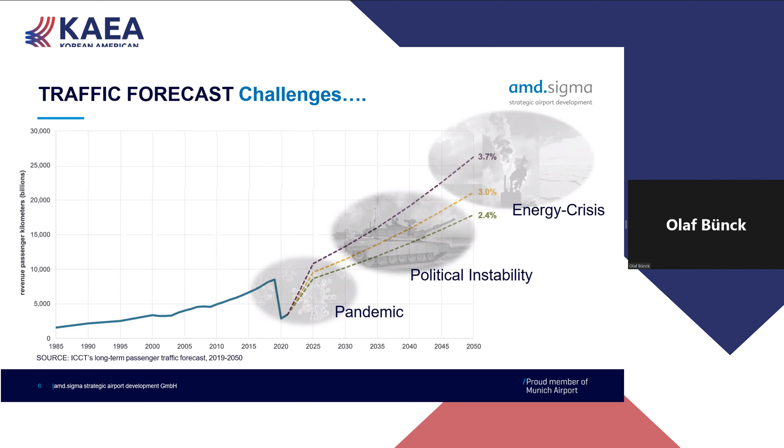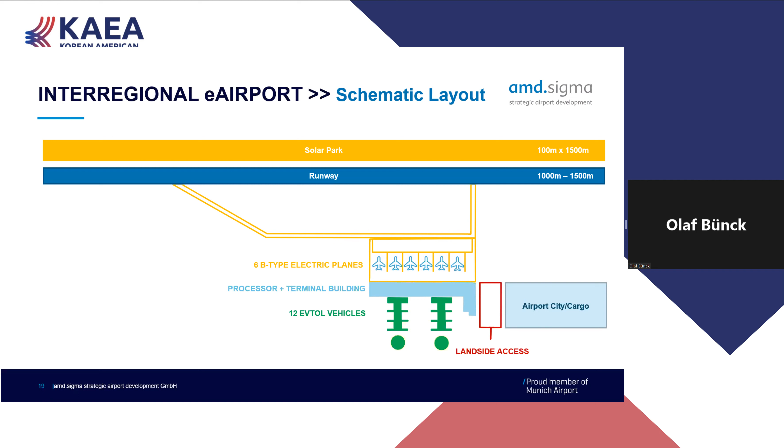So we did this, and I've got about 5 slides to go. Basically, what we did is design this airport so you can independently expand every element. If you want a bigger solar park, a bigger runway, a bigger terminal, a bigger utility building, or more stands, it's all possible without conflict with any other function. We took a long time to come up with that.

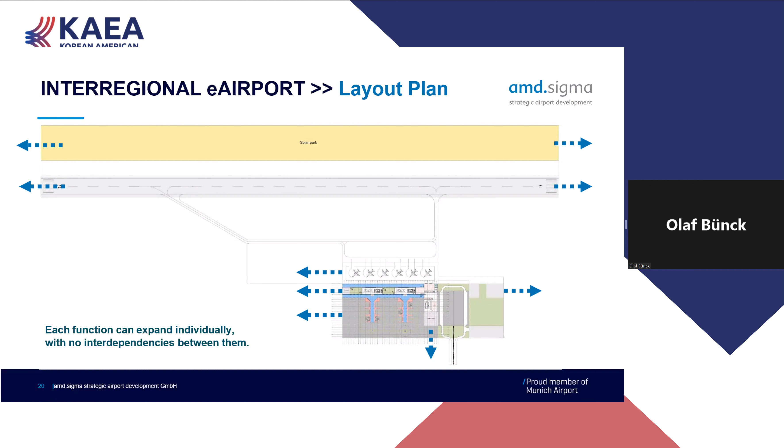And that's how it looks. You have a big solar park, a runway of about 1,000 meters, and on the bottom a terminal building that combines a vertiport and an airport. That's the first one ever designed this way worldwide, so we're quite proud of it.

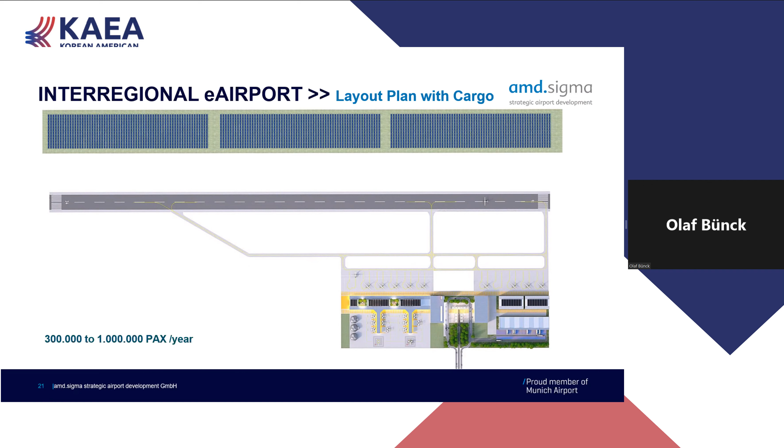And to the right, you have either an airport city or a cargo city, because we believe you can have passengers during the day and cargo during the night, and you get a much better business plan with that.

So that's pretty much how it could look. That's basically quite a lot, but you can start small. You can start with half of the terminal building for passengers. You can also start with only a little for cargo and just go piece by piece and let it grow.

So we have about 12 eVTOLs that feed passengers from the big city into this airport. And we have 6 positions for electric planes that can be 9-seaters, 25-seaters, up to 40. That's how we want to do that, and it can host anything between 300,000 and 1 million passengers.

So the last slides have a few impressions from the inside. Maybe next slide. We can skip. Last slide, we'll go ahead and advance, and then we'll wrap it up and pass it over to Rex.

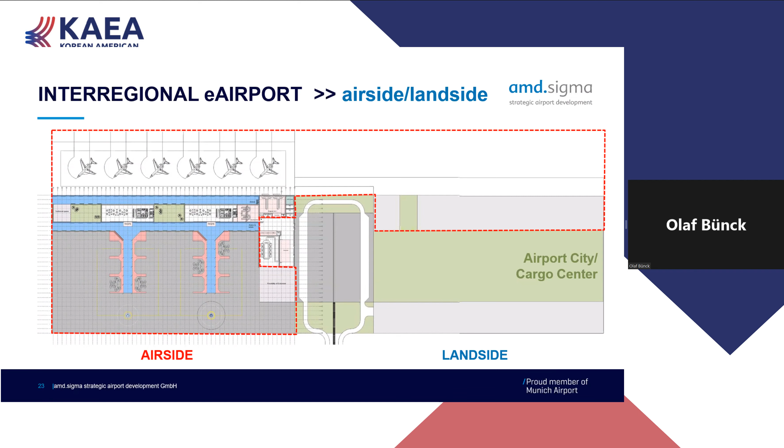So next one, please, that's just the diagrams. If one is interested, you can get the presentation later and look at it. Next one. Next one, I just want to show these interiors.

We want to build this as a wooden construction. It's all on one level. There's no escalators, no elevators, no pushback. It's a very simple building with inner yards that are green, open spaces with natural ventilation.

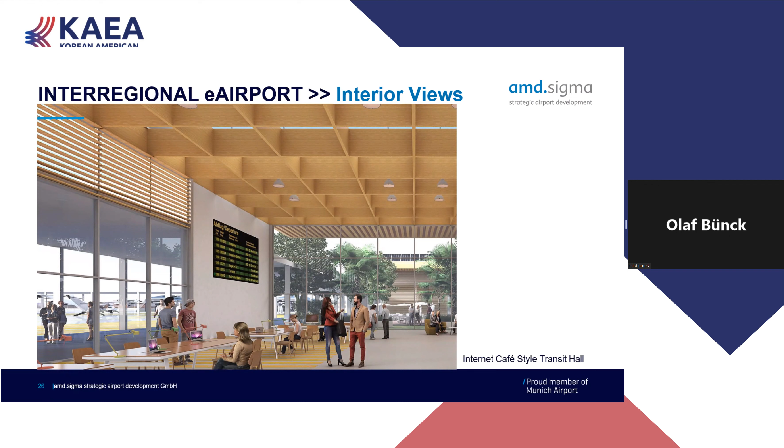And that's basically my last slide. So that's how we imagine this terminal to be - an open space that looks more like an internet cafe than a conventional terminal. So that's pretty much what I have to say.

I hope I'm not that much over time. I'm sorry to talk so much. I hope you enjoyed it. And if there's any questions, please ask.

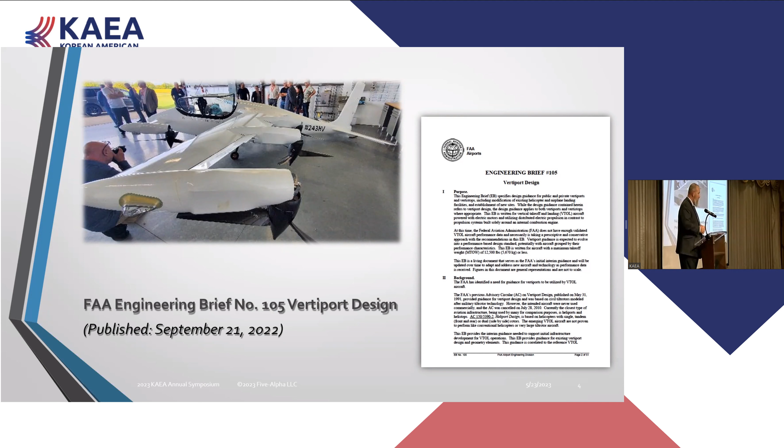We have 105 - that's the guidance we've been giving. Next slide. So this is the engineering brief, published September 21st. It was the second standard for Vertiports. The first standard was published in August by ASTM International. This is directly from the FAA, put in the engineering brief - again, interim guidance.

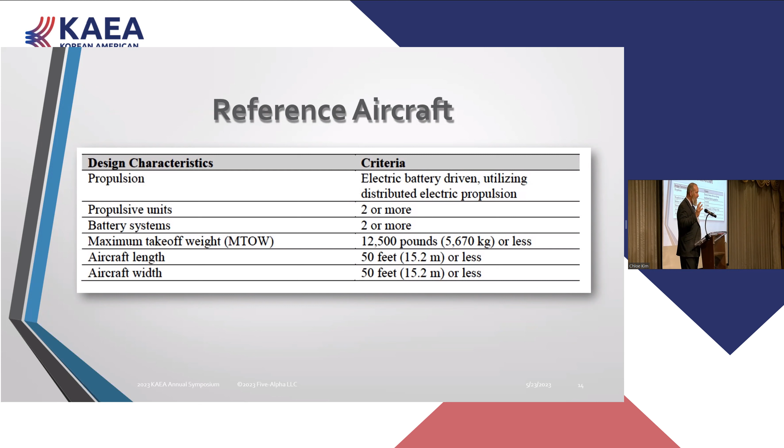Land-based, so we're not looking at anything that's off water, water-based, amphibious, or float operations in this current engineering brief. VFR pilot on board.

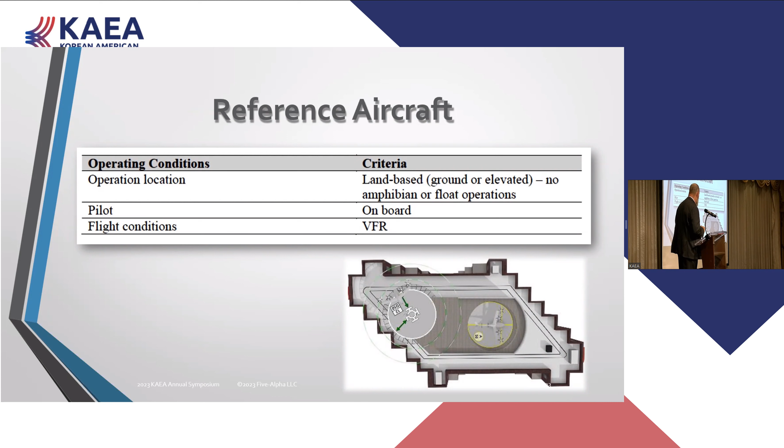If you don't know what hover out of ground effect means, it's a performance classification for helicopters, in the certification requirements under Part 27 and Part 29. When an aircraft, helicopter, or eVTOL is in close proximity to the ground, the airflow gets resistance, and as that resistance pushes back, it requires less performance from the aircraft to hover. Once the aircraft leaves that area, it gets into what we call out of ground effect. Rule of thumb for helicopters is 1.5 times rotor diameter, and you're into a higher performance requiring area for flight.

So that's one of the things we pointed to in the eVTOL: if you're landing with an out of ground effect, normal operations, it must be able to have that performance level. It's quantified as being able to take off vertically and land vertically. And then the downwash, outwash is something we're looking to measure because we're not sure what that is yet—what's that velocity, what's the impact on its environment?

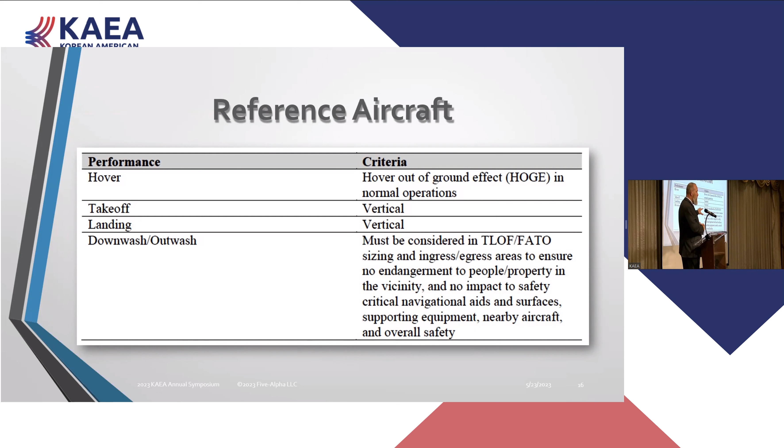There's also the wake turbulence that the aircraft produces. We know there's wake turbulence produced by heavy jets that we want to avoid, but there's also wake turbulence created by helicopters that you don't want to fly through. The rule of thumb the FAA came up with is about a 60-second separation for light helicopters and about a 90-second separation for heavy helicopters, again using that 12,500 pound threshold. We don't know what that is yet for eVTOL. We haven't studied that.

Other than that, if you have an aircraft that doesn't meet that criteria, you're going to have to sit down with the authority having jurisdiction for the infrastructure, which is the airport district office for your region, and come up with a plan forward. If you have something that doesn't fit, it's going to take a little bit longer and a little bit more effort.

We didn't talk about taxi and parking in this first engineering brief, but that's something they want to attack. It's important because when you look at high throughput, you're going to need parking areas, and how you move the aircraft across the ground is a really important piece of the puzzle. Are you going to hover taxi? Hover taxi requires a lot of energy—you're going to burn a lot of energy moving the aircraft. So you're probably going to want a ground taxi. Even ground taxi produces outwash because of using that energy, and you're going to limit your energy.

So then we get into ground handling—we actually use a tug or a dolly to do that. What's that look like? We haven't done that research yet, because each one of those movements has a significant impact on your footprint from a geometrical perspective. Hover taxi requires more room versus ground taxi, and ground handling requires less room than all three. So that's going to increase or decrease your footprint.

What's the difference between a heliport and a vertiport? In the FAA's view, if you're going to have a heliport converted to a vertiport, it needs to meet the transport heliport category. Now in the advisory circular that was in place—2C for heliports, now 2 Delta—I can tell you that nowhere in the United States is there a heliport that has ever been designed to transport category standards. None exist. That being said, most heliports in existence aren't really good heliports, and they're very constrained by their surroundings. To convert a heliport to a vertiport would be, I won't say impossible, but very hard in many cases, because you don't have the real estate necessary to support your business model.

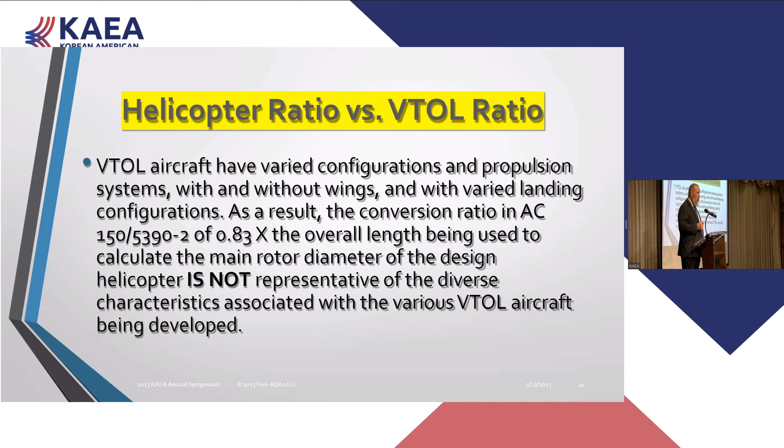Performance minimums, effective translational lift, and hover out of ground effect are the two primaries they point to.

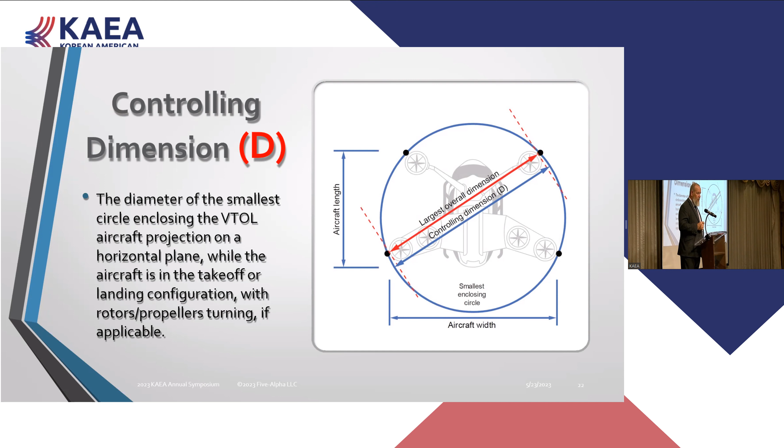This is a new acronym, controlling dimension. It basically equates to what we refer to in ICAO as D, or overall length. So this is now the new D. We used rotor diameter a lot of times in the past, but now it's controlling dimension.

Design and geometry. This is straight out of the book. This is a size that we're looking at today.

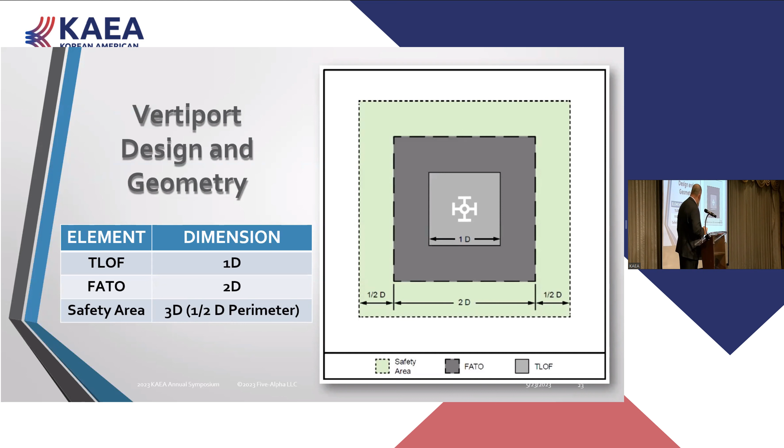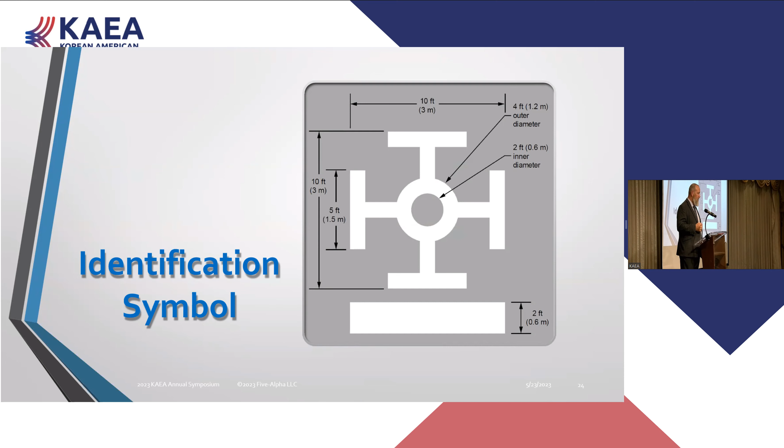This is the original identification from the 1990s for heliports. There's testing going on right now at the FAA Tech Center to identify if this is the right symbol for vertiports.

We talk about conversion, redesigning. That's a criteria in the engineering brief that speaks to that. Again, I said it's challenging to do that.

Charging electricity. One of the groups that wrote the section in the FAA engineering brief that I would pay very close attention to, if you're not familiar with it, is called NREL, National Renewable Energy Laboratories. They're actually a government agency out of Denver, and they do a lot of work in the renewable energy world and have written some of the better white papers in this space for charging.

One of the things at airports, or even at airports and heliports, is what's the separation between the aircraft. This is where we get into wake turbulence separation for aircraft between lights and heavies. We don't know exactly yet what the eVTOLs will produce for wake turbulence.

Benefits of existing airports: existing clear airspace, access to electrical grid, room to grow and expand, capacity for high throughput, mass transit access points. Your average heliport doesn't have that.

Downwash, outwash, we're doing research on that right now, working with Vertiport. We're actually getting ready to kick that off here pretty soon.

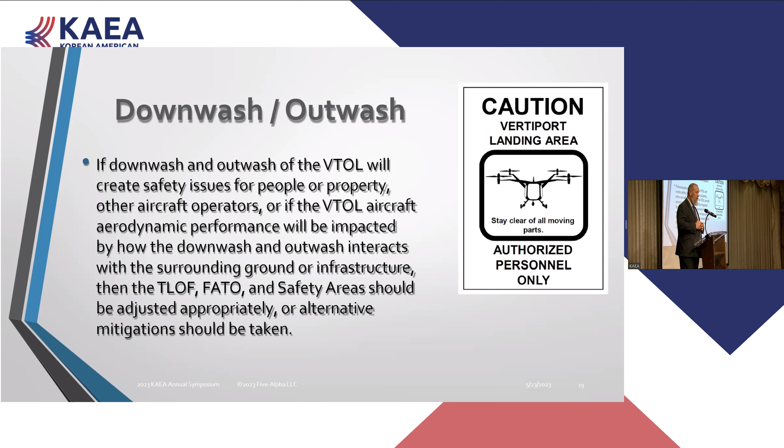Real quick, other standards. ASTM International has a Vertiport standard, published August 2022.

National Fire Protection Association. I'm the chair of NFPA 418, which is a heliport, now heliport-vertiport standard. We just finished our last go around. Expect that to be published as early as December 2023, but as late as June 2024. That'll give fire standards for municipalities.

International Code Council. Haven't seen anything from this group yet. They're the ones that design building code and fire code. We need to engage this group because the municipalities lean on this for heliports. We'll lean on it for vertiports.

New group out there that I've worked with for the last couple of years, designing a standard for illumination, IES. This is not the landing area, this is the surrounding area, the parking area, the refueling area, the loading area for cargo and things like that. But the IES, it's an ANSI standard.

International Civil Aviation Organization, ICAO, hasn't done anything in this space yet. Their first meeting is not until September 2024.

Municipalities and local governments are all over the board. Some are embracing it, some are involved, some are engaged, some have not learned how to spell advanced air mobility, or AAM. So everything in between. Lots of education to be done there. I won't go through that.

Thank you, Rex. Really informative presentation. We heard a lot today from our first two speakers about the need for data to inform standards and some harmonization of those standards internationally. We also heard about opportunities and challenges of existing and new infrastructure, the complex governance landscape, and the need for methodical planning to get AAM off the ground.

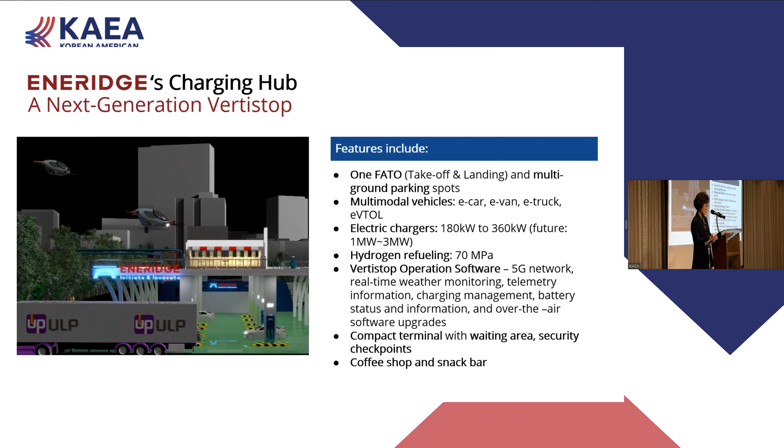We are designing a charging hub as a Vertistop with the following features: one FATO takeoff and landing spot for one eVTOL, and multiple ground parking spots for ground transportation vehicles charging. We will serve multimodal vehicles like e-car, electric van, electric truck, and eVTOL, with electric DC chargers and a hydrogen fueling station, Vertistop operating software, and a compact terminal with a waiting area and security checkpoint. We'll also have amenities with a coffee shop and a snack bar.

This design illustrates Eneridge's hydrogen power plant charging hub with renewable energies and a green hydrogen power source. The components are a small wind generator, as long as it doesn't interfere with aircraft operation, and solar panels, an energy storage system, and Reelcause R&D's container type power generator, and a smart farm powered with heat from the hydrogen power generator.

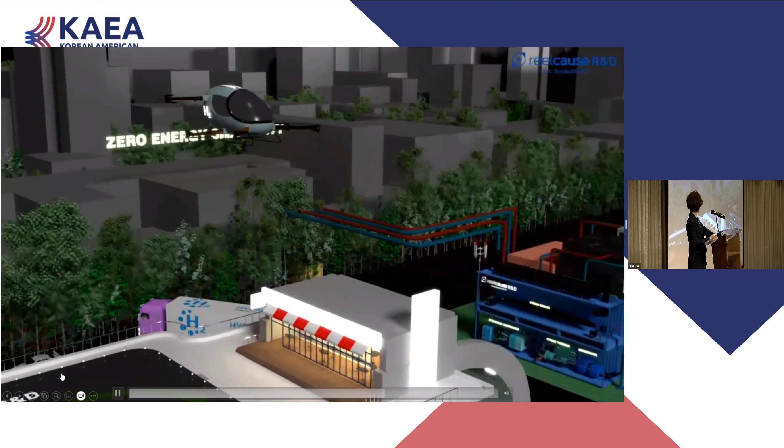So with one FATO, one EV Vertiport pad, and then we're gonna have a ground parking lot with the EV charging station. With power sharing, we can have dynamic load balancing function. We can utilize the existing electricity capacity for eVTOL and the ground level charging station altogether for good utilization.

The key components for charging stations are electric charging hardware and hydrogen refueling station, and an operating event platform. We will provide a DC fast charging station; currently up to 360 kilowatts DC fast charging stations are available, but high power charging stations will be developed and available for airplane charging in the future. And we can provide a hydrogen power charging station.

One more important component is the Vertistop operating event platform. It should be 5G network connected and provide location of charging stations and charging status, network with real-time weather monitoring, telemetry information, charging management, battery status information, and it should be over-the-air software updated.

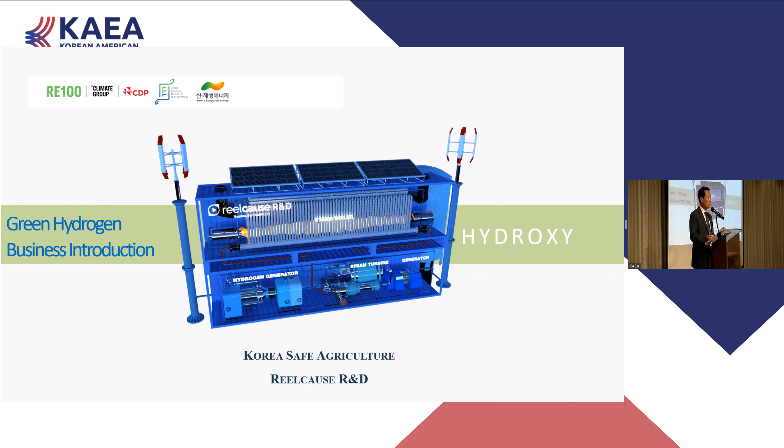So this is the model that you saw. This is where we provide either hydrogen or electricity so that you can move forward with your projects. Let me explain our entire system in a nutshell.

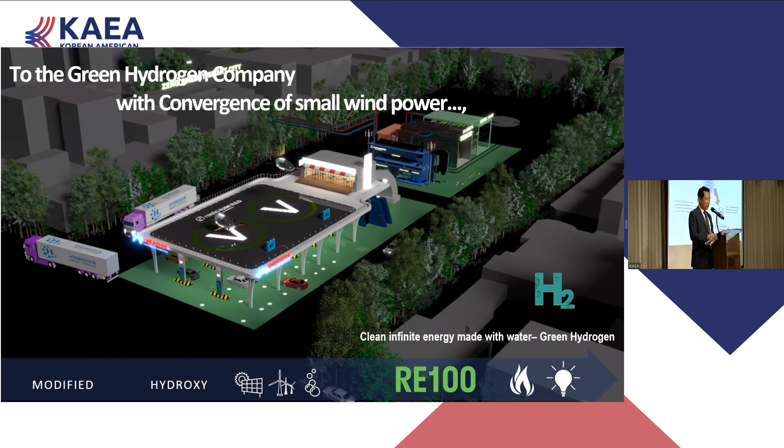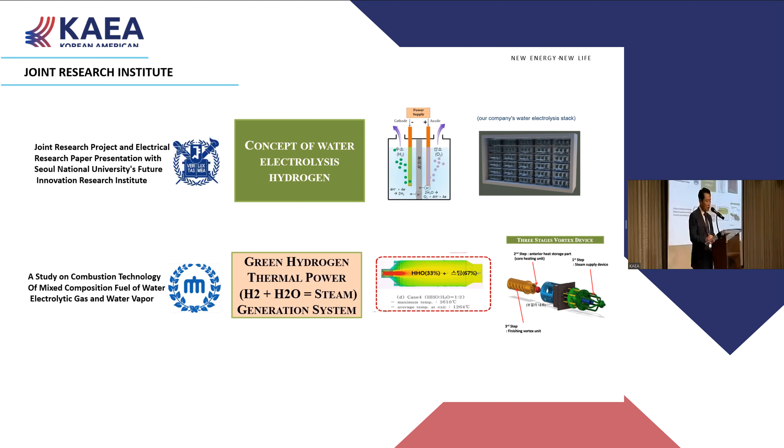We developed a low power water electrolysis system based on small wind power to generate HHO gas, known as brown gas, and further developed an HHO gas burner that generates and burns its own HHO gas through pyrolysis. I'm sure some of you know about pyrolysis. Through this process, we developed an eco-friendly power generation system without producing carbon dioxide or NOx.

Allow me to introduce our key technologies. Our generation system uses an industry proven and typically used steam turbine generation system, which generally uses fossil fuels as its energy source. As you're aware, this popular system has been verified and used for over 100 years since the Industrial Revolution. The only difference is that our system fires up HHO brown gas as the fuel to generate steam in high heat. This is our green hydrogen cogeneration system.

Our key technologies are divided into 3 areas. The first technology is a water electrolysis system, similar to the popular alkaline method. Our key technology that sets us apart from the alkaline method is that our system does not use highly expensive metals and KOH solutions in the process.

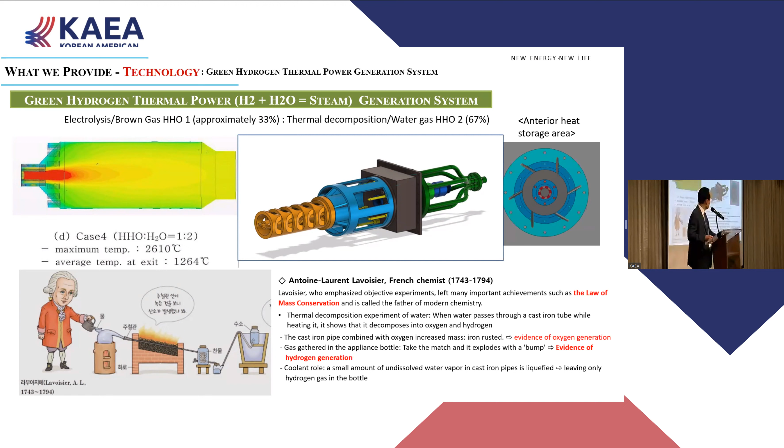Our water electrolysis system only uses water and stacks to produce HHO gas. Our stacks are made of proprietary new graphene compound materials. This is our patented and innovative technology in the water electrolysis system.

This system is jointly researched and co-developed with Seoul National University's Future Innovation Research Institute. Through this system, we were able to minimize the required electricity down to 24 kilowatts per hour to produce 1 kilogram of hydrogen. On average right now, 1 kilogram of hydrogen is produced using 50 kilowatt hours. This new water electrolysis system will allow us to mass produce HHO gas to reach our future goal, a best case scenario, of attaining approximately 20 kilowatts per hour from the current 24 kilowatts per hour to produce 1 kilogram of hydrogen. In other words, we're improving our efficiency.

This is our second patented core technology. It's called the HHO burner system, which heats an anterior heat storage section located inside the boiler to generate additional HHO gas through pyrolysis using recycled steam supply. This technology is co-developed through joint collaboration with Chungnam National University.

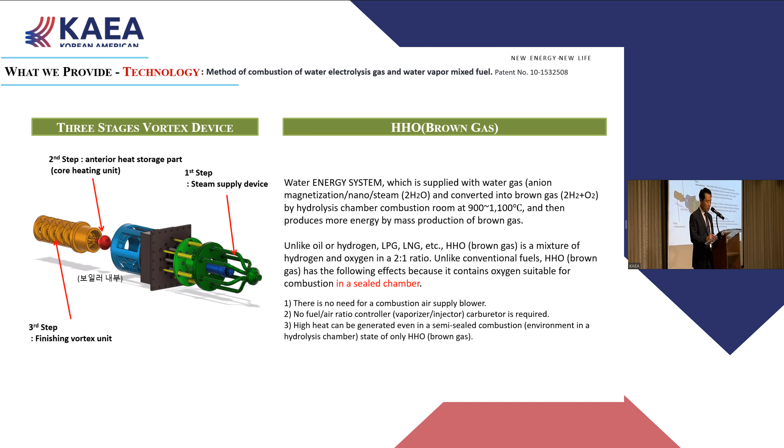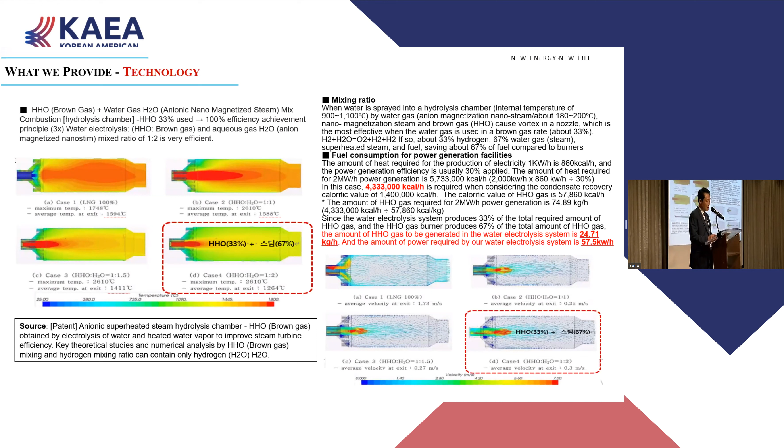So this is complicated, but when you get a chance to take a look at it, you will understand. It's a very complicated chemical process, but we were able to reach our results.

Through our first water electrolysis system and additional HHO burner system, we are able to complete the third and final eco-friendly green energy generation system. With our innovative technologies, we can provide green hydrogen and green electricity to all of our partners to eliminate carbon footprints on our planet. Thank you.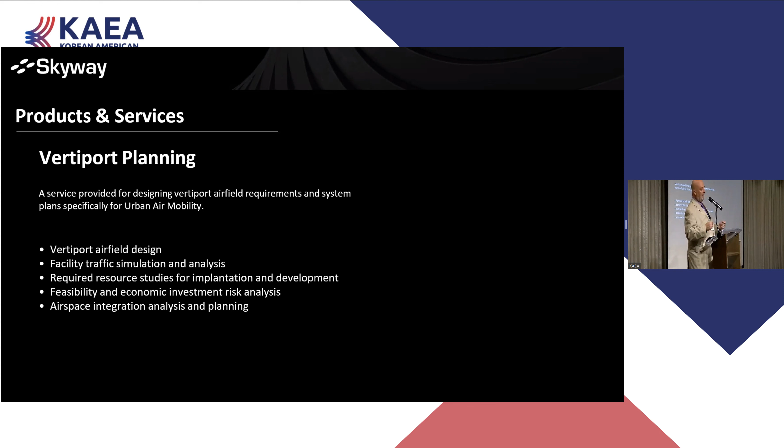Let me tell you a little bit about Skyway, which is the company that I work for. Skyway is building the transportation management systems for both drones and eVTOL aircraft that are going to operate over our communities. Within that group, I am the senior vertiport integrator, meaning I handle all of the layouts of the vertiports and help the air traffic control system, which is going to be automated, operate in that vertiport environment. Senior vertiport planner, but I haven't built one yet, so in this case senior just means old, I guess.

Air navigation service providers - this is a woman sitting in what we call one of our navigation chairs. Again, it's a fully autonomous system, but if an error or anything comes up that needs human interaction, then we have somebody waiting, a human in the loop system. Otherwise, it's mostly fully autonomous.

This describes what our traffic management system is going to do. It's going to be accepting the flight plans from these aircraft. It's going to be deconflicting anytime there's a conflict between two aircraft, generally by holding the second aircraft before it leaves the ground. We are going to be fully integrated with emergency services, so we're never holding up a police or fire search and rescue operation because somebody ordered Starbucks coffee to be delivered to their home.

These are just some of the partners that we work with every day, including Transoft, which makes the software I use in order to do computer simulations of vertiports and airports. And Siemens is our electrical partner, so Siemens helps us with a lot of the electrical problems.

I think I'm going to just very briefly talk about this. We all understand why infrastructure is needed. We are behind schedule for developing the infrastructure we need so that when these aircraft are certified and ready to operate, we have all of the facilities ready for them.

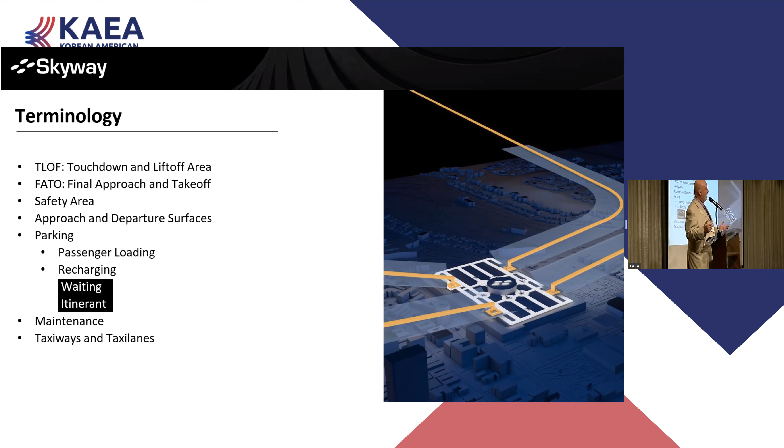Maintenance, taxiways, taxi lanes, everybody gets that. We will need those facilities in the overall system. You might not need them at every vertiport and every vertistop.

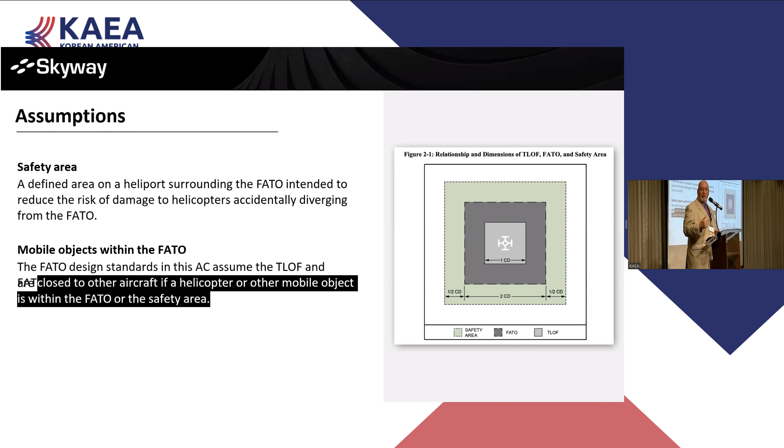The only thing important here is that when there is an aircraft within that safety area that is on the FATO, just landed or about to take off, there can only be one. So that also affects the capacity. You can't have another aircraft hovering in to land on a FATO while another vehicle is already landed on that FATO. That's one of the assumptions I needed for developing the capacity analysis for these vertiports.

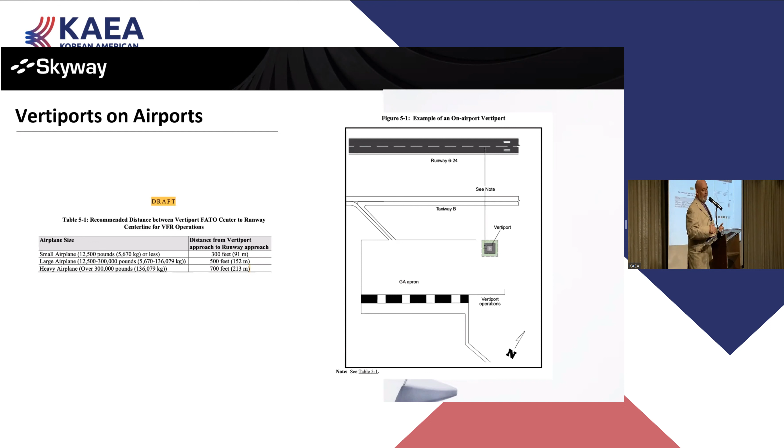This is the only exhibit in Engineering Brief 105 that actually addresses putting a vertiport on an existing airport. It tells you exactly how far away from the runway you need to be based on the size category of that runway. If you have heavy aircraft coming into your airport and you want to put a vertiport there, you need to be 700 feet away from the center line of that runway. At Orlando International, the parallel runways are 4,500 feet apart. At Tampa International, they're only 2,500 feet apart. So that's a big deal - how much space you have to put your vertiport on your airport, which I believe is going to be necessary because airports are going to be the first adopters of this technology.

Maybe it's coincidence, but United also has 7 hubs in the United States. I'm of the assumption they're going to take 100 aircraft at a time and put them into one of their hub markets. So don't expect that your vertiports necessarily are going to start with 5 aircraft and grow from there. Some are going to start with 100 aircraft on day one, because that's what you need to develop this business. If you're starting a cab company, you don't start with 1 cab because you're never going to be reliable - you start with 50 cabs, and the same is going to be true of this type of service.

For passengers to decide to use the UAM system, the trip must be faster and more convenient than the alternative. Nobody's going to pay more money for a trip that takes the same amount of time, or for a trip that is way too confusing. So the highest level of service we as planners and operators of vertiports can provide is to get passengers onto the aircraft as quickly as possible and get them along their trip as fast as possible.

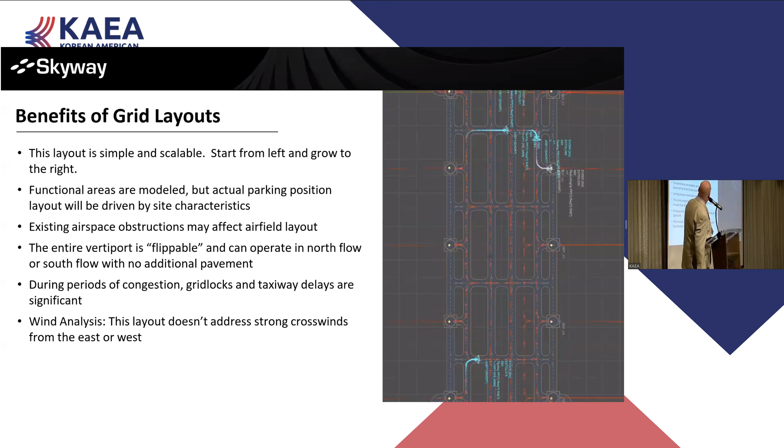I'm going to skip over this slide. Go to the next slide for me.

This is a new way of thinking. I don't know if you can see this. In the simulations I've done, we laid out Vertiports with FATOs left to right - an arrival FATO and a departure FATO, so I end up with this grid of FATOs where they're arriving on the bottom and departing on the top. And it's scalable, so you can start with only 2 FATOs and grow up to 5 or 10 or however many you need. But the only problem is if you had a direct crosswind, your Vertiport might be closed. Now, we're not even sure what the crosswind components are of these aircraft yet, but once we find out, you don't want your Vertiport to be closed because of a crosswind.

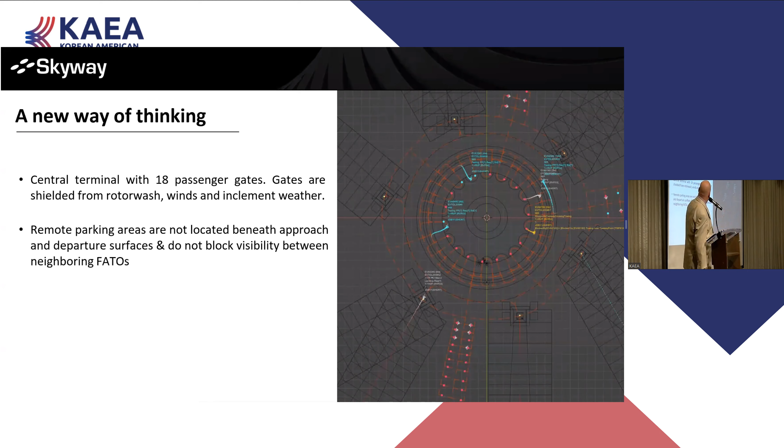This is what it looks like when you lay out a Vertiport with a terminal in the center to minimize taxi times. Gates are wide at the airfield side because I lay out a Vertiport so the aircraft can come in and turn - halfway through the turn, he unloads and loads up his passengers. If you simply pull up to a terminal, facing it, then you have to back out or have the aircraft tugged, and we're trying to avoid all of that manpower. So it's wide on the air side, getting very narrow on the land side, because the gate doesn't have to be very large - the aircraft only holds 4 people. So even if the gate held the next 3 flights worth of people, we're still talking fewer than 20 people.

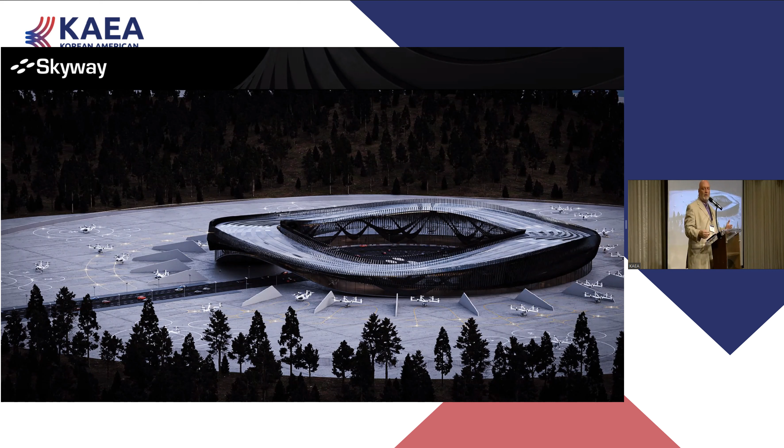And I think that's it. Next slide - oh, I'm going to skip through. Let's go, I'm going to skip through a lot of these. I'll show you when to stop.

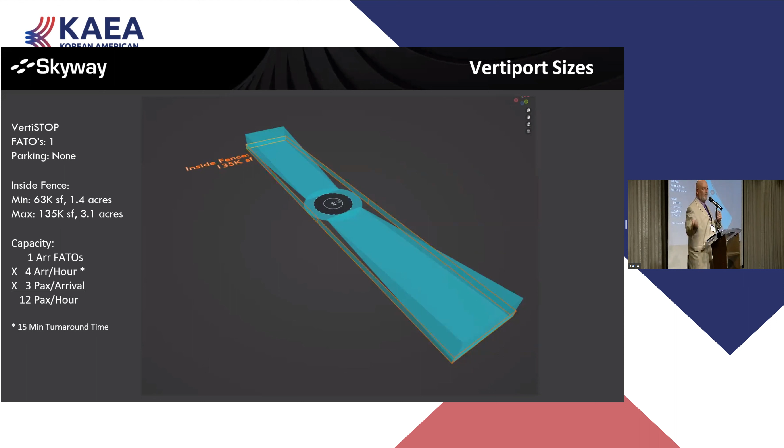Right here, this is the Vertistop, we talked about this earlier. This is the smallest possible Vertiport. But how big is it? Well, I'm showing it at 3.1 acres. If you put a fence line around the entire area - what was the heliport protection zone, which isn't in the engineering brief now, but maybe - it's basically an area large enough so that if a kid was sitting at the end of that fence line, he'd have to throw a basketball 50 feet in the air to get above the aircraft.

Next slide. And this is what it looks like when you put it on top of a football field. So when you see a lot of graphics, NASA exhibits even, showing aircraft taking off from tops of buildings and tops of parking garages, keep in mind that this is still a pretty large space.

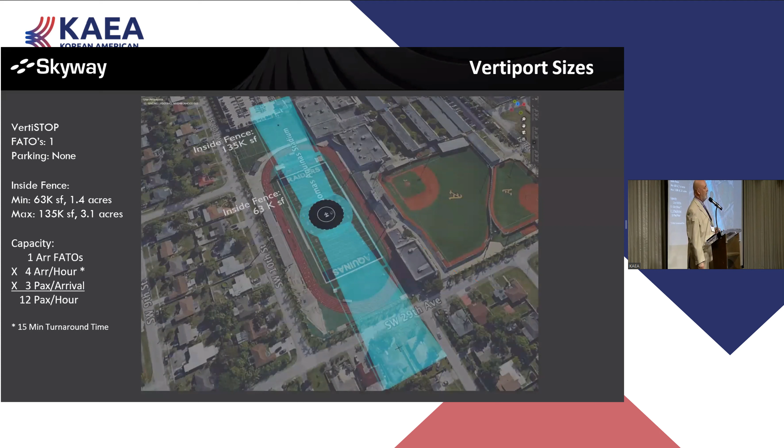If you include the safety area around the FATO, that's 150 feet across. It's about 3 football fields in length to include that. Let's run through to the next one and keep going.

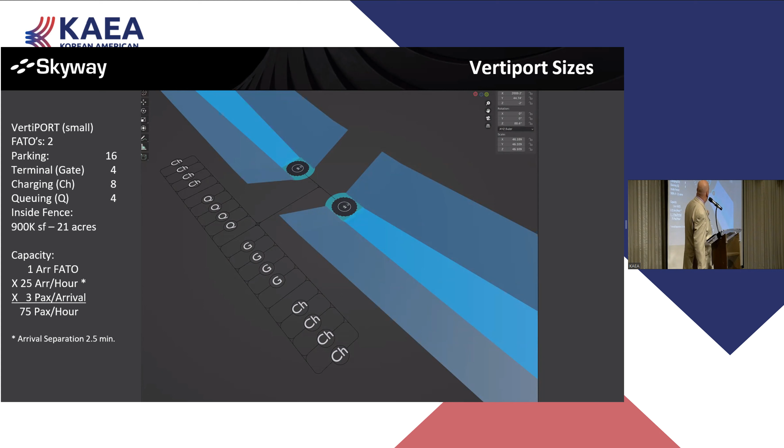This is just showing that I need more gates. One more - if I include the airspace surfaces, that's what that looks like. This is now 21 acres, almost 1 million square feet.

This is only 2 FATOs, 1 arrival, 1 departure. Now let's go to 4 FATOs, 2 arrivals, 2 departures. Now I've introduced the terminal building.

Everything smaller than this, I didn't necessarily need the terminal building. Now I do, because I've got 7 passenger gates alone. And I had 15 charging spots, 8 queuing, 44 acres for a 4 FATO vertiport.

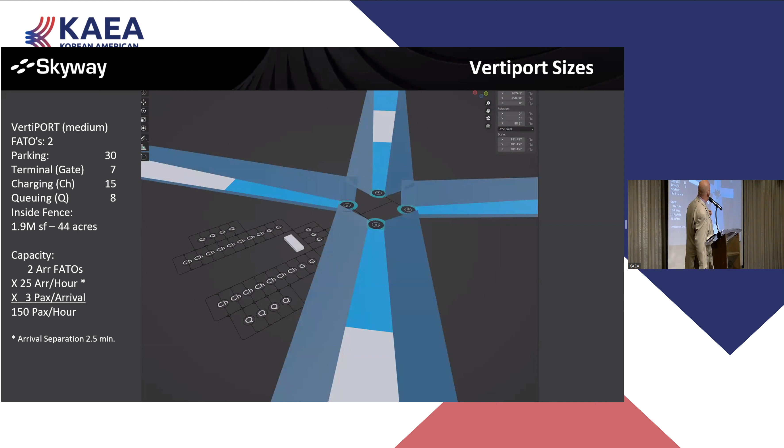Next one, last one, we talked about. Go ahead and skip through these couple of slides. We can move surfaces. Next one, we're going to go to the biggest possible, what we talked about earlier as a VertiHub.

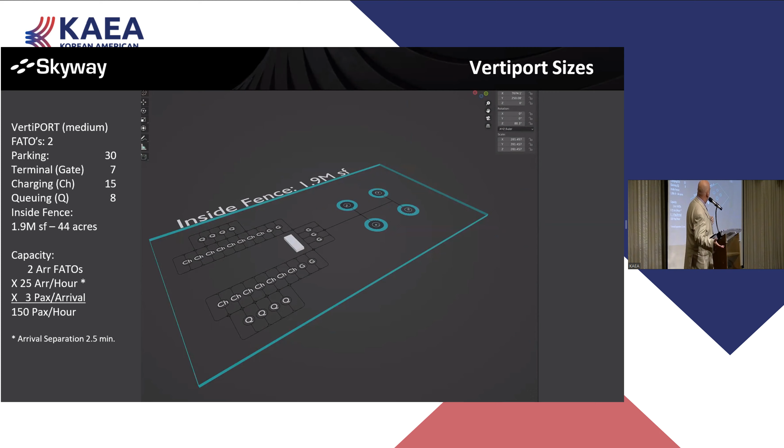Here's that centrally located terminal, 7 FATOs around it, 4 for arrivals, 3 for departures, because we think it's going to take longer to land than it is to take off.

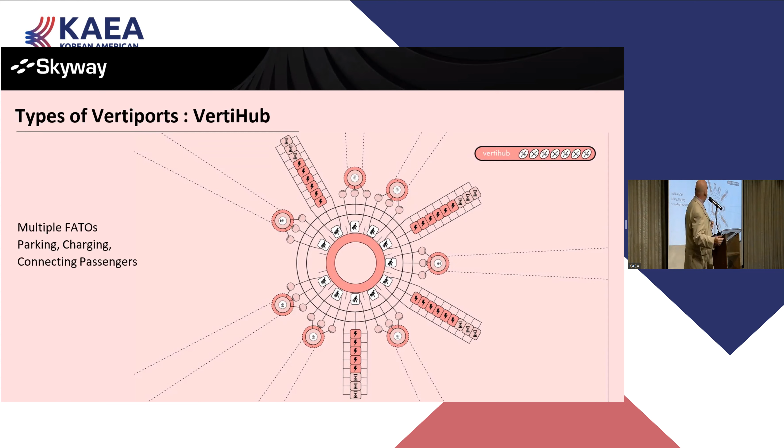I think we'll get to the total acreage - we're up to 87 acres. So keep that in mind when you're planning these vertiports at your airports.

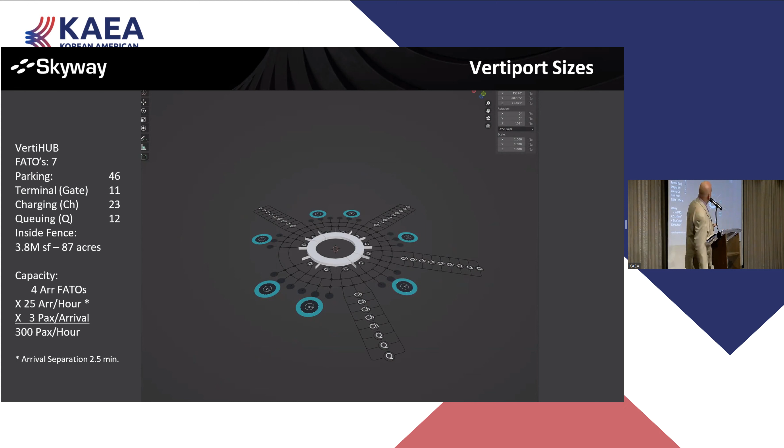One more, I think will finish us off. Keep going through these. One more.

Finally, a Vertipark. Vertipark is a special type of vertiport, not meant for passengers at all. This is a vertiport meant just for the aircraft.

If you Google the word vertiport and look at the images, artist renderings of vertiports, you never see enough parking. You certainly never see 200 parking spots, but that's what you're going to be bringing into your community.

So if your vertiports aren't big enough to hold the parking overnight in storage, then by putting in a Vertipark in your community, you can have them all charge in one location overnight.

The charging will be less expensive because you're delivering the electricity in bulk. You're also doing it at night. And ideally, if your airport has enough space for solar panels, you can minimize that cost as well.

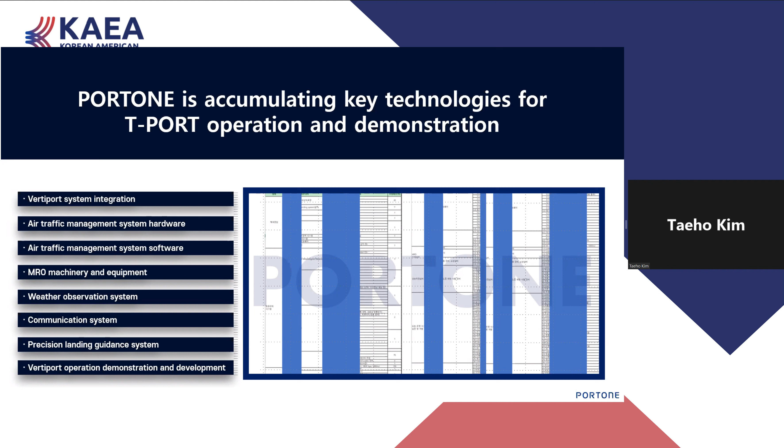Now, PORTONE plans to build 15 to 20 Vertiports across the country by 2028. These Vertiports would include both Vertihub and Vertiport. Apart from this, we are discussing the Vertiport project with local governments from the perspective of creating a future industry.

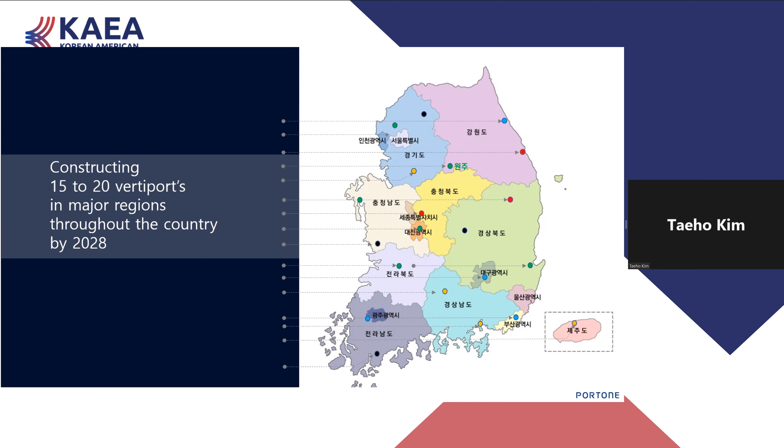We also aim to be one of the top 10 Vertiport companies globally by 2030. To do so, we will work on making a standard Vertiport in 2025, along with securing the operating area of Vertiport in 2023, and in 2027 we plan to expand overseas.

To achieve this goal, we have a team of 3 C-level directors and an external advisory board consisting of 8 members with diverse expertise and perspectives.

Although PORTONE is currently a small Vertiport startup in Korea, we have a big dream of Skyverse and being the first company in the world to achieve this. Skyverse means a world where everything done on land is also done in the sky. If you want to know more about Skyverse, you can buy the book, The Skyverse Era, created by UAM, scheduled to be published in mid-July in Korea.

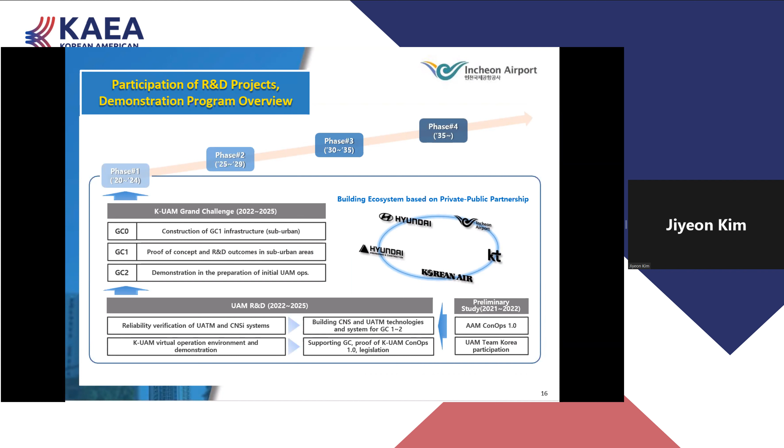Incheon Airport also participates in the K-UAM Grand Challenge, a national demonstration program to pave the way for commercial eVTOL operations. Next.

These are the efforts to increase public acceptance, include hosting annual K-UAM Confex with Incheon Metropolitan City and conducting flight test demos with UAM companies like Volocopter. Next page.

So far, we have explored what Incheon Airport is doing to facilitate the successful adoption of UAM. Moving forward, I'll provide a brief overview of the future of Incheon Airport's UAM initiatives. Next page.

This is the key point of my presentation. Unfortunately, there is currently an obstacle preventing Incheon Airport from realizing UAM operations within the airport area. The layout of Incheon Airport includes 4 runways arranged in a strictly parallel configuration with passenger terminals 1 and 2 located between these runways. While it would be ideal to locate a vertiport near the passenger terminals for convenience, the present technology does not allow eVTOLs to cross the runways safely.

If an eVTOL were to approach from the east, where the capital city Seoul is located, it would pose an extreme risk to both conventional aircraft and eVTOLs. Consequently, to reach the passenger terminals, eVTOLs would need to take a detour over the ocean and carefully navigate through a narrow path between the runways. While this detour allows for sufficient separation between aircraft and eVTOLs over the ocean, it results in longer flight times and a riskier path due to the narrow available airspace. As a result, the location of the vertiport needs to be carefully selected, prioritizing safety as a foremost value in the aviation industry.

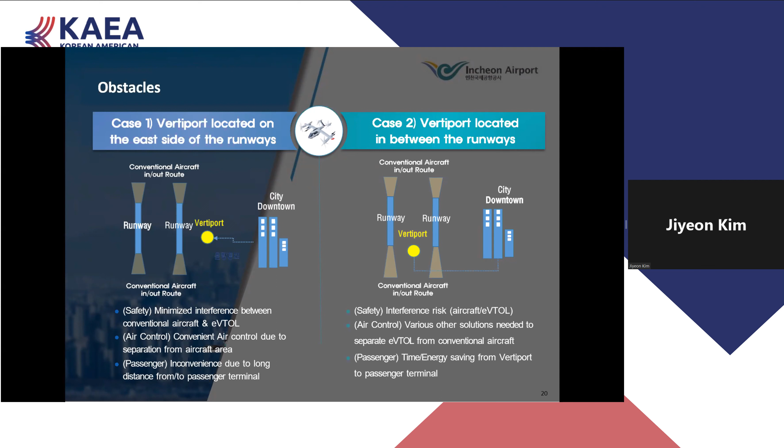Okay, moving on to the next page. It's important to note that the remaining pages related to Incheon Airport's vertiport location and facility plan are potential plans that are not yet finalized, decided, or official. These are just brainstorming ideas under consideration. Therefore, I kindly request that you treat this information as a confidential brainstorming concept and refrain from sharing it as an official release.

Considering the early stage of the industry starting from 2025, the focus is on minimizing safety risks as discussed earlier. Given the need for careful consideration of safety, the initial locations being considered are situated on the east side of the runways, near the cargo terminals and Logistics Park. These locations provide a balance between safety considerations and operational efficiency at this early stage.

Next page. The vertiport facility in the early stage would consist of takeoff and landing sites, small passenger facilities, and a monitoring system. Next page.

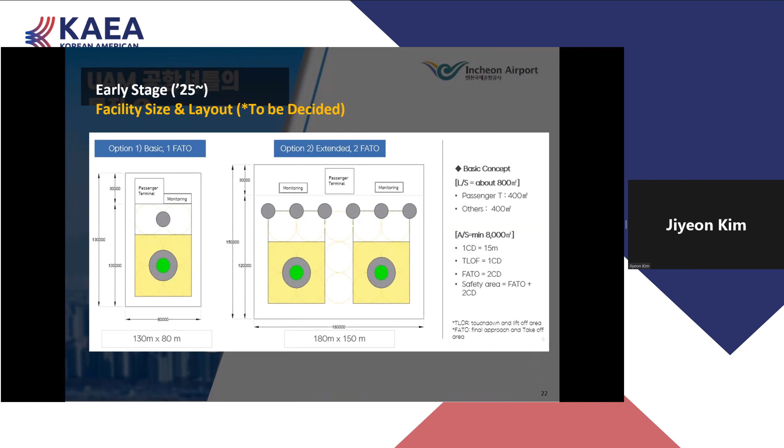In the future, once the UAM industry matures and advanced technology has addressed safety concerns, the goal is to have vertiports located at passenger terminals, enhancing convenience for passengers. This concept design presents the integration of a vertiport within the fully constructed Passenger Terminal 2 of Incheon Airport.

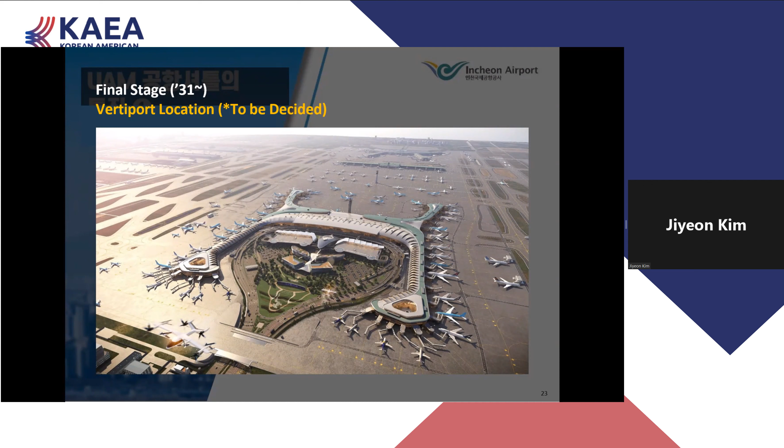The concept design for the Terminal 2 Vertiport proposes locating the facility above the short-term parking lot directly in front of the terminal. However, it is crucial to emphasize that safety and technological challenges must be resolved first.

This is a potential facility size, a layout with several FATOs and aprons.

While final decisions on vertiport location and infrastructure are not yet determined, Incheon Airport is preparing for UAM operations, including implementing a helicopter airport shuttle service.

Given the current challenges in UAM operations, a viable alternative is to utilize helicopters. By starting with VTOL aircraft such as helicopters, and transitioning to eVTOLs once they are commercially available, the groundwork for UAM services can be established.

Collaborating with a company named Moviation, Incheon Airport is working together to establish UAM services and infrastructure for existing VTOL aircraft.

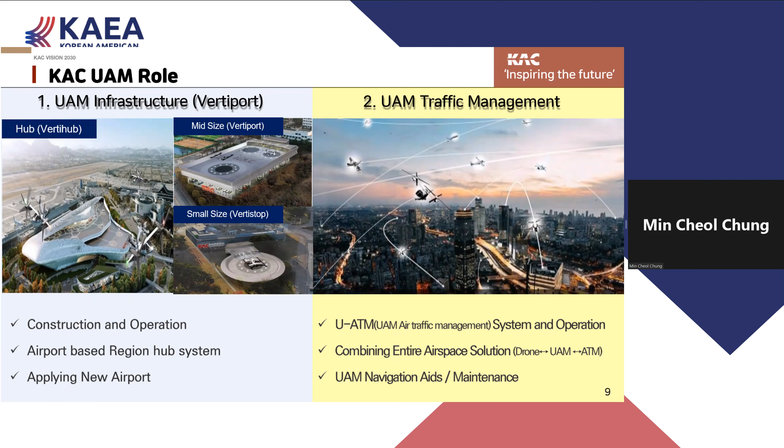Like everybody knows, UAM arose to solve urbanization and traffic problems inside cities. But can UAM actually solve urbanization and traffic issues?

And also, is it possible to realize the movie of the Fifth Element? Because every media introduced UAM as air taxi and fully automated flying cars. Every public thinks that UAM will operate like this.

But there are hundreds of hurdles for a fully automated UAM. We have to consider economy and selection factors, and also all of the legal and regulations, etc. And also for infrastructures, I'll talk about the hurdles for infrastructure in the next slide.

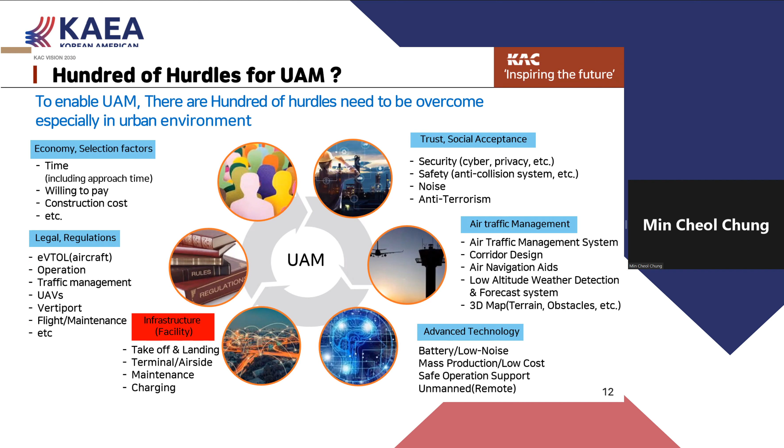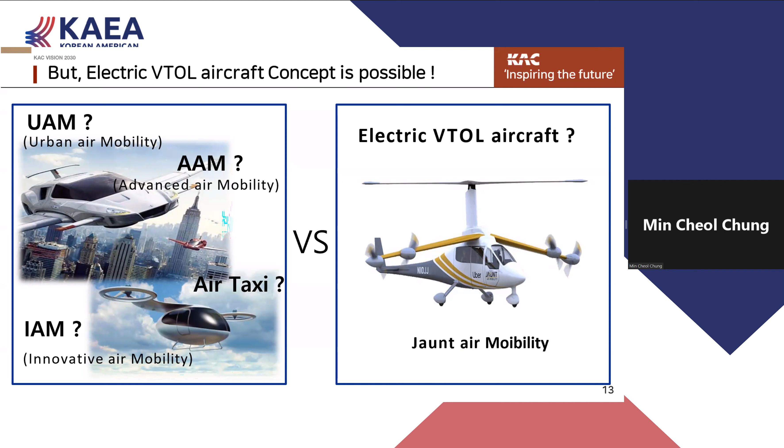So let's think about this. UAM is not a fully automated flying car, but it can operate as an electronic fleet of aircraft like electric helicopters. It will be possible in the near future.

So for the initial phase, the Korea Airports Corporation prepares UAM for regional air mobility. UAM will be an effective way for regional transportation, because the transportation system is very well developed in the Seoul metropolitan area, and in the initial phase the ticket price will be comparatively higher than other transportation modes. Regional transportation will be the most effective way to apply in South Korea.

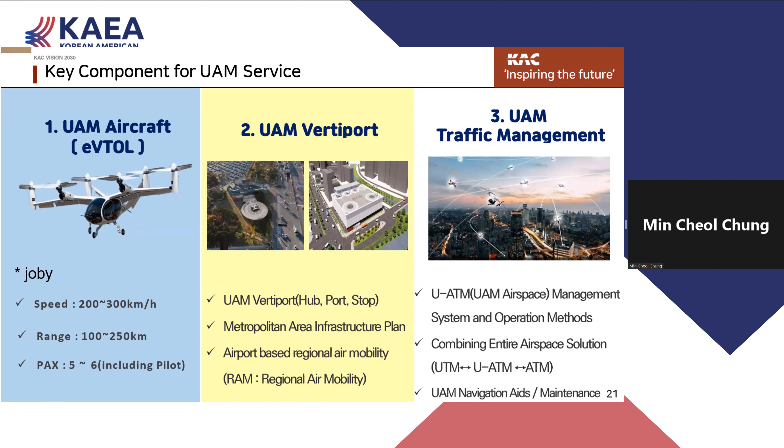And you know, the Vertiport, which is the ground infrastructure for UAM, is the linchpin for urban air mobility.

Actually, we are now preparing Vertiport operations in South Korea. We found out there are many hurdles to construct and operate the Vertiport. We have to select the land and location, consider surrounding area obstacles, supply a large amount of charging facilities, and consider urban planning. So we have to cooperate with local governments.

We also have to consider whether these Vertiports can infringe property rights, because when we build Vertiports there will be an obstacle clearance surface nearby. Then buildings next to the Vertiports cannot build high, so they might sue the Vertiport operators. So we think this is the most important factor to consider when operating the Vertiport.

Vertiports have to converge all transportation, so they have to consider connections with other transportation, including future ones.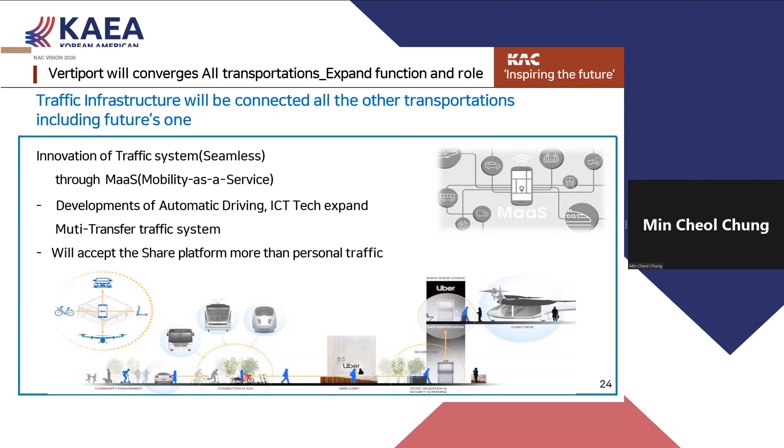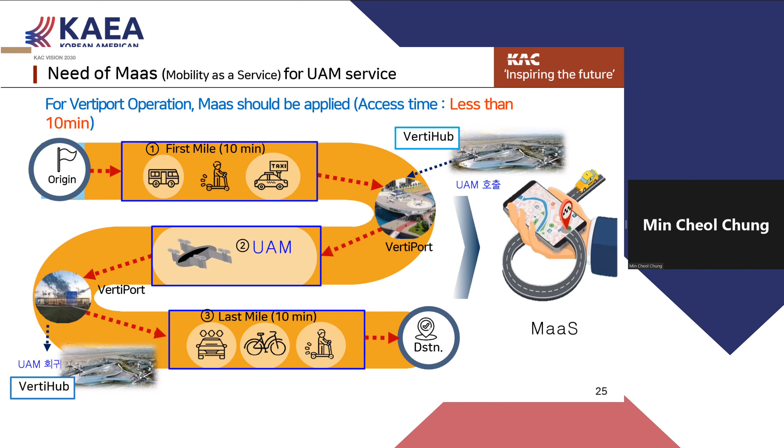Also, the MaaS service is critical for UAM operations. Everybody knows about this slide, so let me skip it too.

These Vertiports as MaaS stations will be the core of future traffic infrastructure in the city. So we are also considering this for new hometowns in South Korea, not only the current urban core area.

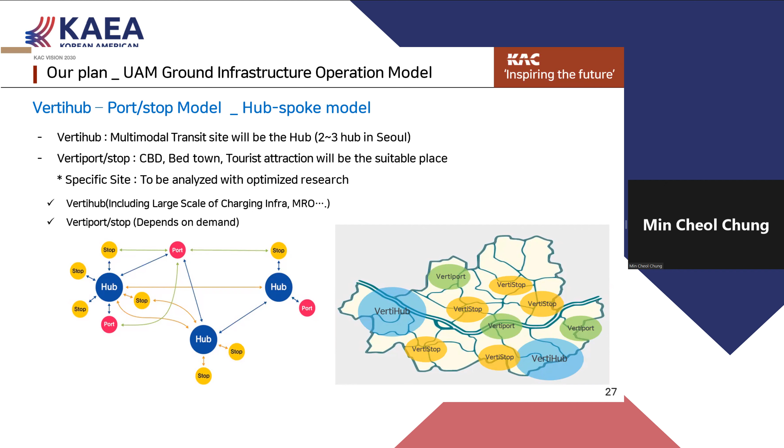We think the hub, similar to the hub-and-spoke model in legacy aviation, will also affect the UAM industry, because it is really hard to secure land in the urban core area, but we need large land to park eVTOLs overnight and for MRO and charging stations. So we think we have to centralize all these functions into the Vertihub, and then the smaller stops can shed that burden for functions, so they can be constructed depending on size, land size, and demand, etc.

So we also set levels for the vertiports. The biggest one is hub, mid-size is port, and the smallest size is stop.

I'm really glad to introduce our project. We are now preparing the Gimpo Vertihub in front of Gimpo Airport's domestic terminal.

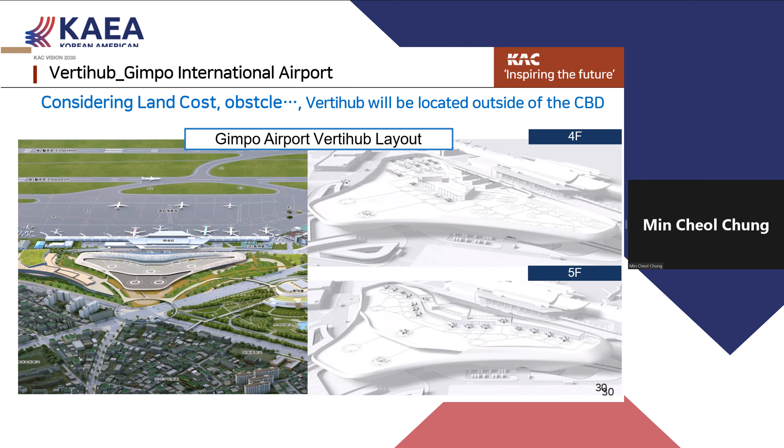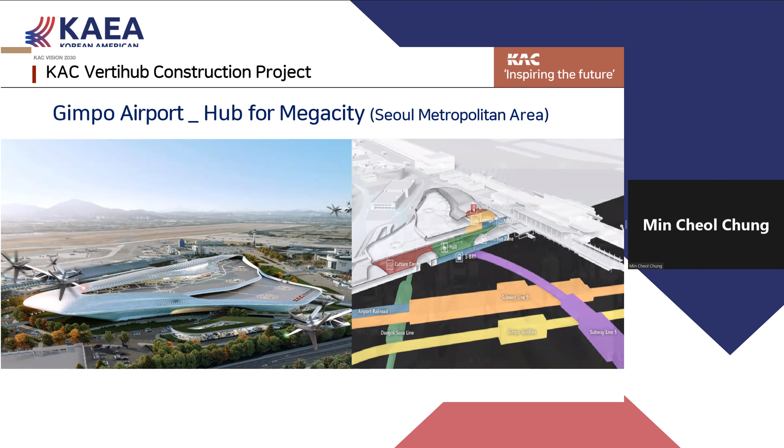This will be the mobility hub in this whole area. It will combine all the transportation modes, including 5 subway lines, SBRT, taxis, and express bus, etc.

It consists of 3 blocks. Block A will be the mobility hub, like I explained in the last slide. It also includes block B and C. Block B will be the aviation cluster, and block C will be the innovative mobility cluster, so that we can combine all of the stakeholders and create synergy.

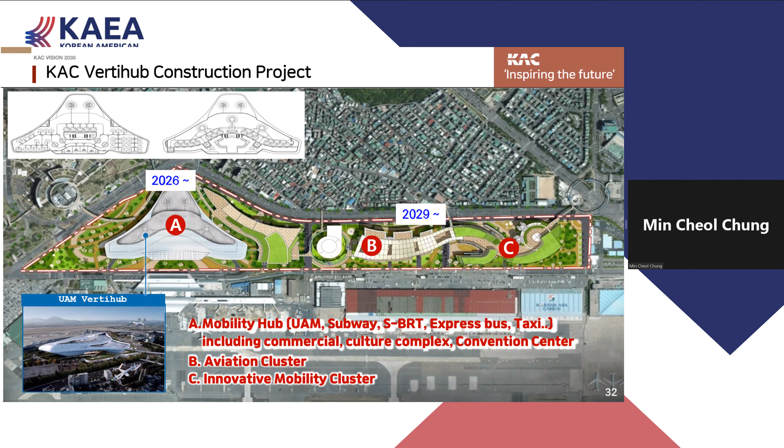Let's focus on block A, which is the mobility hub. We will use the rooftop for the Vertiports and Vertihub, and from the underground it will combine the SBRT and 5 subway lines. This building will also have a cultural park, commercial complex, and e-charging zone.

And this is not just a picture. We are now undergoing the preliminary government feasibility study, and next month we will get the result from the government.

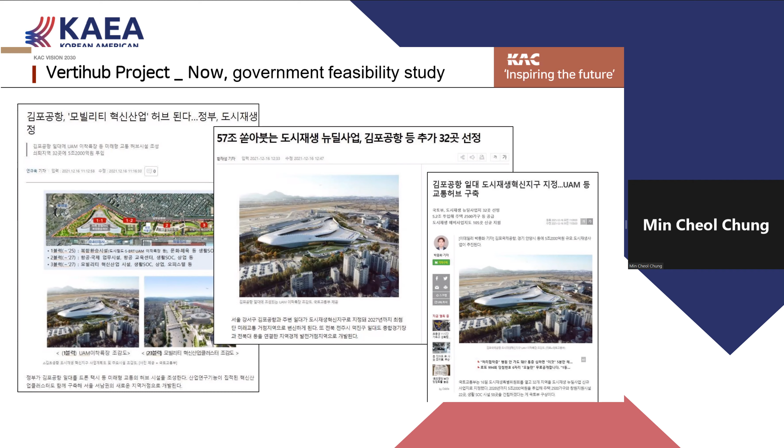Let me explain how we think about selecting the Vertiport and stop site. For phase 1, we need to determine the UAM Vertiport quantity in the city, and for this we have to consider the UAM demand and government policy.

Next, for phase 2, we need to select the UAM service area. In this space, we have to consider conversion demand and other factors like geographical and demographical things, as well as public purpose, complementary means of transportation, and induced demand.

The last phase, phase 3, we can select the Vertiport's location within the UAM service area. In this space, we have to consider economic factors, technical factors, and social factors.

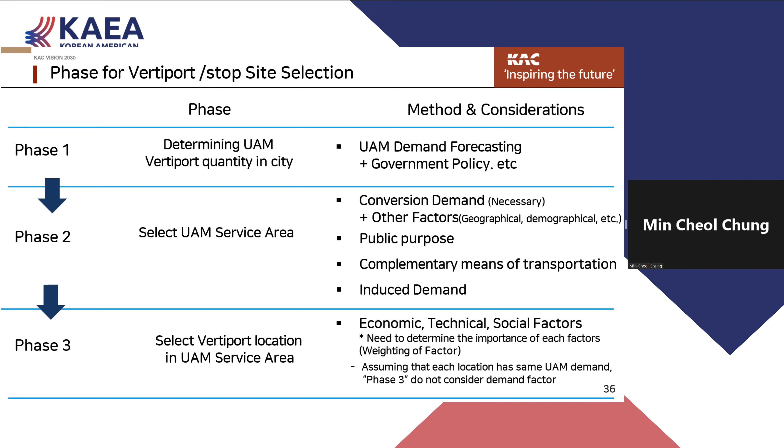For the initial Vertiport and stop sites, we start from public land, because it is really easy to secure land by negotiating with the local government. We are now cooperating with our local government, but in the end it can expand to various locations like intersections, rooftops, urban streams, highways, etc.

Can I stop my presentation here, because next is a description of the UAM system. Thank you for listening to my presentation. Thank you for your listening.